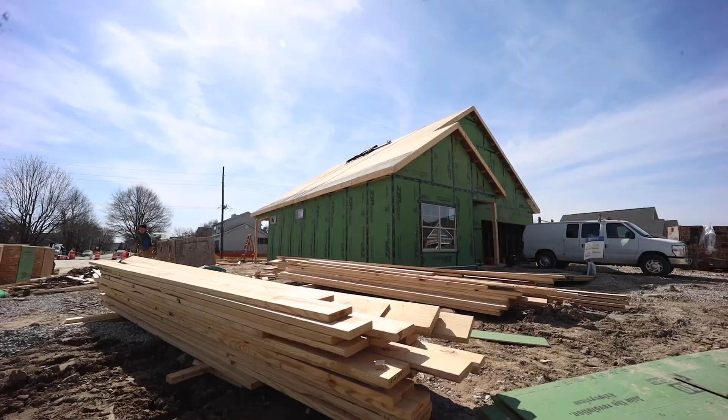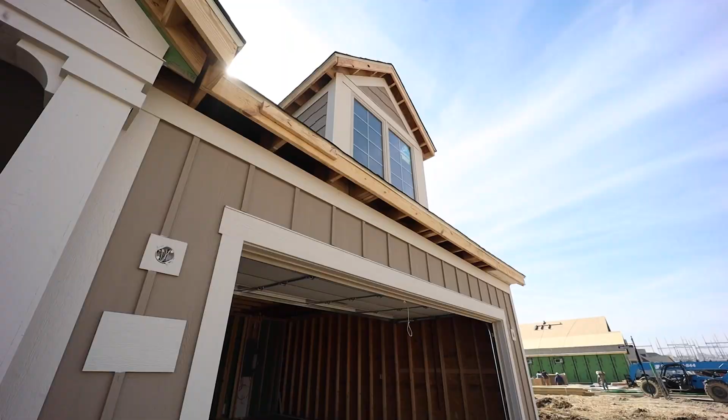Anyway, all right, so let's talk about how we build tight, ventilate in every home, in every market, in every band. A long time ago, we didn't have to worry about this. And it wasn't actually that long ago. If you actually go back to the 1970s, we were building houses so leaky that I'd say we had an air management strategy, and it was to allow the house to manage the air.

If you've ever read any history books about the people that lived in the American plains, they'd talk about waking up in the morning and dusting the snow off of their comforters because the snow would blow through the windows, and wiping their windowsills down every day from the dust that would blow in the house. We built some pretty leaky structures, and that way our inside air and our outside air kind of equalized, over time.

The challenge is we got to the 1970s, and we started inventing tools and looking into building science, and we had the energy crisis, more specifically. I lived through that—a couple of people here have enough gray hair that they actually lived through that. And we started tightening up our homes.

I remember originally, man, we'd take plastic sheeting and put it over all of the insulation and then put the drywall up against it. Don't do that now. But we used to do all of that kind of stuff.

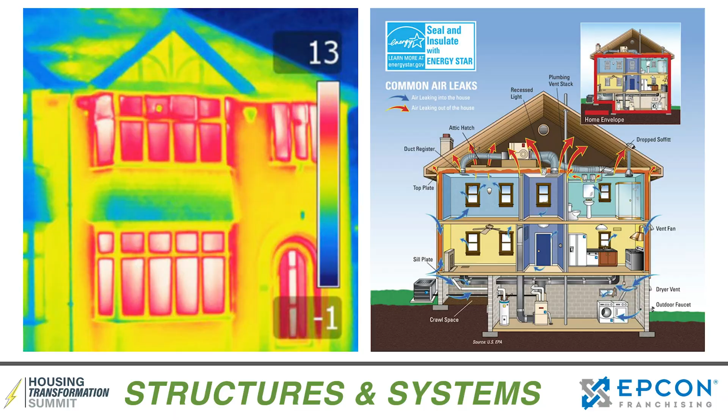We'd tighten these homes up because we were trying to get a really energy efficient envelope. But then we started realizing when you tighten a home up like that, there are unintended consequences with respect to condensation, air movement, the amount and quality of air in the home, the volatile organics in the home, the particulate, et cetera.

So we got to a point where we figured out that with the technology we're building, you can build too tight. You can make a house really tight, but without the air management science side of this, it's not a healthy home. It's not a comfortable home to live in, and it ends up with a lot of consumer complaints.

So from there, we have a new era. Now we're actually looking at what I call a new term: atmospheric management. The reason I call it that is because when you start talking about indoor air quality, people go, oh yeah, that's particulate—we're going to filter that.

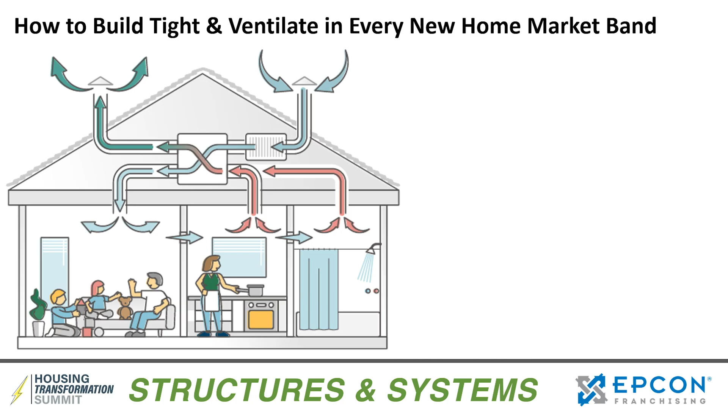Yeah, but it's humidity too. It's also gas concentrations. What about CO2? CO2 is a big deal in a home, and how are we managing that? What about radon? You can walk through all of these different things. What we're really trying to do is create an atmosphere inside a living structure that is healthy and comfortable for people to live in.

That means we're going to manage particulate. That means we're going to manage gases. We're going to manage temperature. We're going to manage all of these things in a fairly complicated system.

So it used to be we had temperature control, and that was what we did. It wasn't really atmospheric control, it was temperature control. Now we have atmospheric control—we're trying to control temperature, humidity, air quality, particulate, gases, energy recovery, room-to-room and inter-room air stability, even air safety with things like CO.

We have other systems that measure smoke, CO, and things like that. But if you're actually measuring and managing the entire atmosphere, my view is those systems are all going to coalesce at some point.

We're going to be sampling the air in our homes, and it's going to deal with all of these issues in a closed-loop system. Every day, every hour, we're going to have homes that are comfortable to live in, that are healthy to live in, and that give us information back telling us we're living in a much better home.

When we get there, the difference between a used home—where you don't know whether that home is hurting the health of your children—and a new home, where you have a monitor on the wall showing that every single day they're living in a healthy environment, that will be a huge differentiator for our industry and our ability to extract value from that.

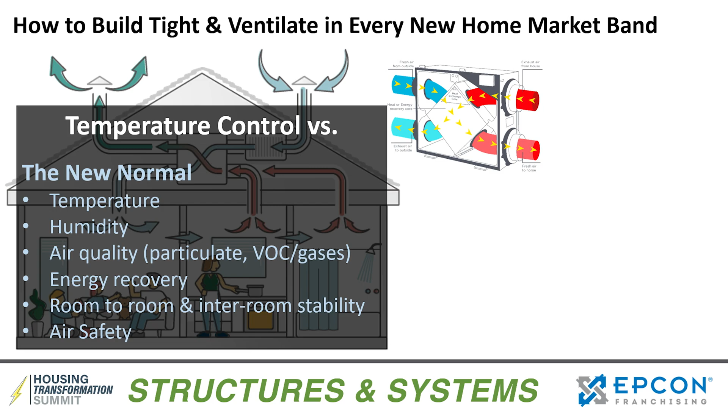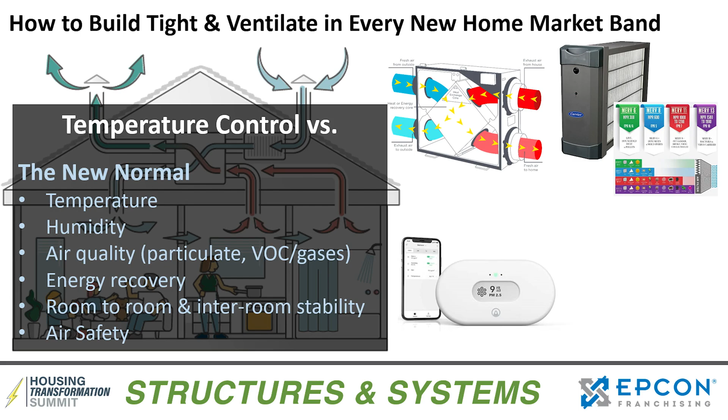We have a lot of new parts and systems you hear about all the time: ERVs, all kinds of electrostatic filters, 4-inch filters, HEPA filtration, MERV ratings. We've got all kinds of control systems out there as well. So this stuff is all starting to come together.

Today I'm super excited because we've got three individuals up here from completely different backgrounds. We've got Cam from Carrier—he knows all about the technology of all the parts and pieces that go into the home. They have incredible research centers; we had several pre-meetings with Carrier to talk about their technology. He's going to come up here and talk about why buildings fail and what you can do about it.

And then you've got a superhero of mine, Brian McCarthy. Brian owns, runs, and founded Abrazo Homes, which is the largest private builder in New Mexico. He absolutely terrifies the rest of the builders there. He is a visionary—no, I'm serious, you're a visionary. He does things that other builders don't do.

It terrifies them and makes them change as well, on your coattails, but they change because they have to. Because who wants to buy a home that's not an Abrazo home? Nobody, that's the bottom line. If you're in Albuquerque, nobody wants to, you're forced because you're out of homes.

Close to it. Yeah, but I'm serious. He has positioned himself building a better and different home.

And you're going to talk about your history. You didn't always build them that way. My guess is your first home was pretty shitty. Okay, I've never had him go, yeah, I built a shitty home. Okay, this is a first. Oh, but we learn, right? We learn and evolve, and he, as a builder, is going to kind of tell you his journey.

And Jefre Outlaw, I've known for a very long time. Jefre was your worst nemesis. He was actually a mold inspector for many years, right? So he was out there seeing the carnage in our industry, how homes fail, figuring out and going through the diagnostics to figure out how they failed, what they needed to do, how do you remediate. And then he switched from there and he went into the tiny home industry.

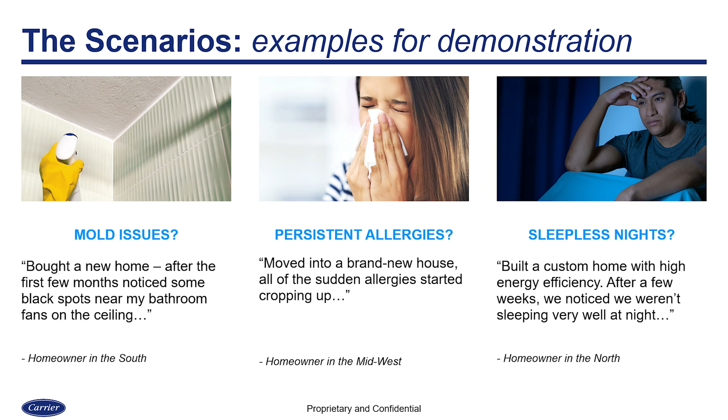Same thing on allergies, right? They move into this house and all of a sudden they start breathing the air. They start to get used to it. It's too tight, the air can't get out. You don't have any exfiltration in the home because we've built it super tight. Their allergies start to crop up. Their noses are running, they're sneezing. They're doing all this stuff because they have a dog. They're allergic to dogs, but in their last house it was breezy as all get out.

And so you had this nice air balance here. It just concentrates, and that dander is everywhere. And they start to sneeze all the time.

Or if they're in the north, and this one actually happened to me, it's sealed up too tight, that CO2 gas starts to concentrate. One of the leading indicators of really high CO2 is you sleep like crap because you're not getting enough oxygen to put yourself into REM sleep to allow your body to actually relax. And so if you have that concentration of CO2, you start to have problems with sleeping.

That happened to me. I lived in a house in Minnesota with zero ventilation. In the winter, when I had all my windows shut because it was negative 20 degrees outside, I had accumulations of CO2 and my family couldn't sleep. So we had to figure out how to manage that in our home. And once we did manage it, we were able to sleep again, which was really nice. You don't realize how much not being able to sleep well impacts your life until you don't sleep well.

So I have a very specific use case for this. This is a video from 3 weeks ago in my town in Houston. Ironically, as I was putting this together, this popped up on the news one night. I was like, what are the odds that this is going to pop up and be relevant? But I wanted to play this for you. This is not like theoretical stuff that's happening in the world. These are things that are happening right now.

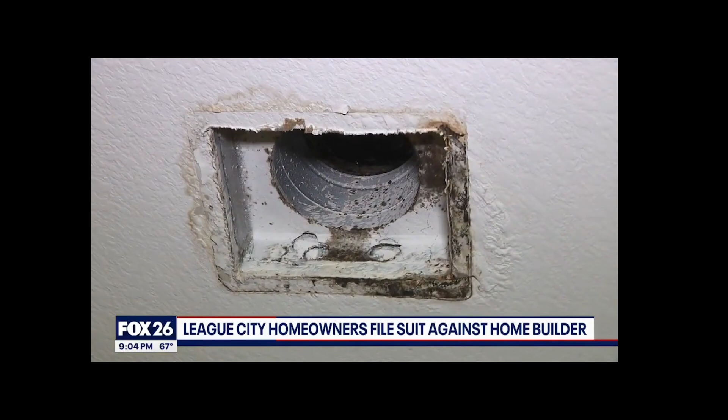This is Ashley Olive's dream house, but she and her family haven't lived here for almost 2 years. I tore out this supply vent, and this is what we found. According to the lawsuit, the reason Ashley and 2 other homeowners in the same block have fled their homes: dangerously high levels of 3 kinds of mold.

It's not healthy for them, for anyone, to live in an environment with extraordinarily high mold counts. Ashley's attorney, Ernest Freeman, says a professional mold inspection confirmed the dangerously high levels, in the tens of thousands of mold spores per cubic meter, in some instances over 1 million.

Specifically it deals with improperly ventilated attics, and then the attic space not being properly sealed to the living spaces below. So you have a hot buildup of humid air. It was consistently reoccurring enough.

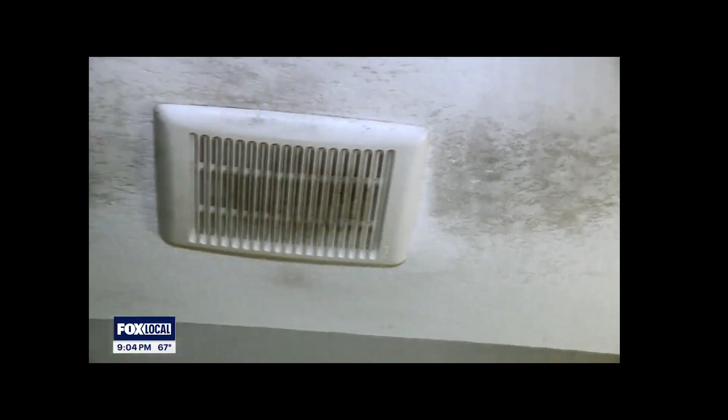Ashley says she and her family moved out of the house in the summer of 2022 after a licensed mold consultant issued a letter stating, in her professional opinion, the home was unfit for human habitation.

It really just depends on the day. Some days I'm mad, some days I'm sad. More than anything, I just want to bring my children home.

Ashley and her husband are paying the mortgage, rent on another house, and all the bills for both houses. There was certainly some mom guilt knowing that I had all 5 of our children living in this home, knowing that it could be potentially affecting them in their future and what that would look like. We definitely struggled with knowing that's what we had raised our children in.

Yeah, so that was on my news in Houston. And they identified the builder a couple of times.

So this is the extreme ramification of not managing the air quality in a house, right? And what I see more and more, especially from the performance side, is as we tighten, we're not paying attention to these other aspects. And when we tighten, they explode in terms of their importance.

And this is the result, right? This is a very visual result. Mold is black, and when it's on the ceiling, you see it and you know it. But longer term, just as you guys were talking about PEX yesterday with chlorine...

If we don't have the code, we don't have the analysis, what we have is the science. And we know that eventually we're gonna see problems in these houses if they're too tight. And it's gonna lead us to more and more problems like this in the longer term if we don't tackle it up front. So what's causing these problems, right?

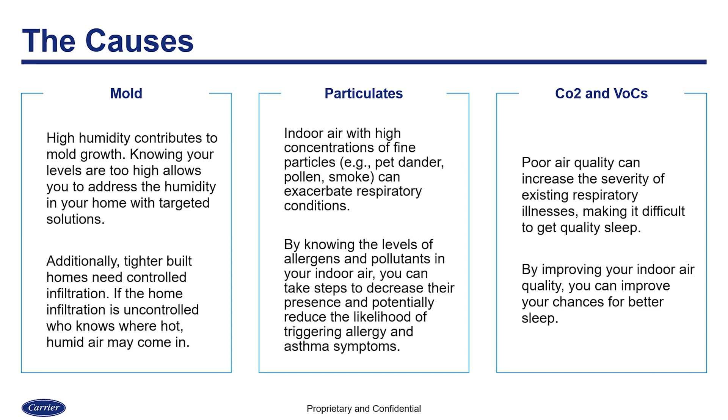You allow the air conditioning system to try and manage it, but as we build really, really tight, humidity spirals out of control, and an air conditioning system that's not dedicated to managing humidity is not going to be able to handle that load. The other reason that we get really high humidity is because our ventilation is not controlled.

So as soon as a person walks into a house, this is my favorite quote, as soon as you walk into your house, your air quality inside is worse than it is outside because you're there. You produce humidity, you produce CO2, you dust off from the day. Whatever you bring into the house, you have made the air quality worse, right?

You got dogs, you had cats, you had people, you had kids, and all the messes they make. Your air quality inside is worse than it is outside, assuming both things are isolated from each other. And you produce humidity, right? We sweat, we perspire, that is a creator of humidity into a space.

So if you don't ventilate to balance that out and take that air out and bring fresh air in, you're not gonna allow that house to breathe, especially with as tight as we're building them.

Particulates from allergies and sneezing and dust accumulation, that one's obvious. We probably all understand that. That's better levels of filtration.

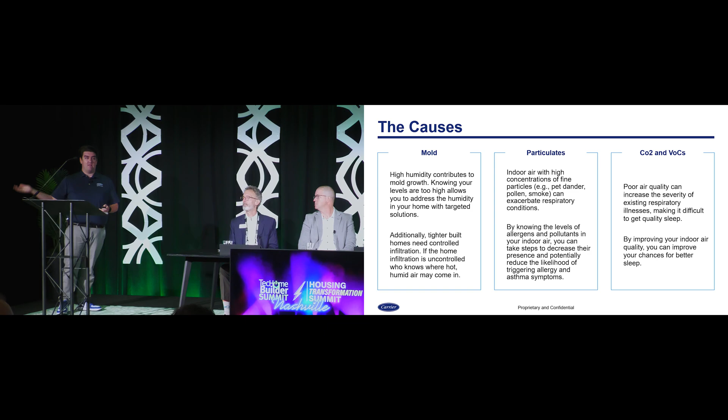But it's also, to a certain point, again, going back to ventilation and allowing that house to breathe and taking some of that air just completely out. Just remove some of that air from the space and bring in fresh air that doesn't have all those particulates that we bring into that space. And again, allow that home to better balance with the outside and create that equilibrium.

And then the last piece is CO2 and VOCs. And VOCs is really tough for us, right? Because we're talking about new houses.

New houses naturally off-gas because they have brand new material in them. One of the biggest challenges I see, and we'll talk about this tomorrow in the last session, is managing that expectation with homeowners when they move into a new house and your building materials are off-gassing, or they bring in new furniture. That's the best time for VOCs to spike, because a brand new couch is loaded with VOCs because they just made it. It's got to have a chance to stabilize in that environment. That's the management aspect, and then we have to drive the education piece with homeowners to understand what it is we're talking about.

So there's really four big spots from a solutions perspective we can tackle into this, where we have equipment now that we can use to help balance these things out. We've seen the effect, we know the cause, so what's the solution? How do we start to look at solutions and products that can help us drive better indoor air quality in a space? It comes kind of top down.

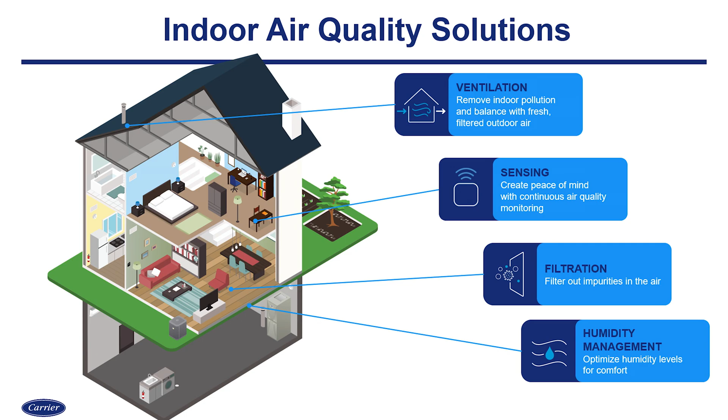Ventilation is my personal most important piece, because if you put ventilation into a home, you at least tackle into a lot of these things. Ventilation is really the only way you can solve CO2, and it's really the only way you can solve VOCs. It will help you with humidity and it will help you with particulates, but it's not the ultimate solution for humidity and particulates.

That's one big piece of indoor air quality - very often it's not one size fits all, and it's not one piece of equipment to just solve the problem. We talk about energy efficiency and say we're going to throw in a high efficiency heat pump and solve the energy efficiency problem. You can't do that with indoor air quality. You have to look at your build, work with your modelers to figure out what the right combination of things is based on the building science of your home.

Outside of ventilation, I'm going to skip the middle one because they stuck it in a weird spot. We've got filtration. Filtration, again, is obvious - you move up to higher MERV filters, you filter more air. It's pretty straightforward. I've been really surprised that out of COVID, we don't see massive adoption of air filtration.

There was a lot of time spent on hand sanitizer and masks and stuff. The studies that came out about nine months after COVID were that if you filter your air and get your air changes up, your ability to spread COVID drops through the floor. That's why airplanes went back so fast, because the filtration systems on those planes are astounding. Planes are super safe places for COVID. Airports suck - that's where you're gonna get COVID. If you went on a trip and got COVID afterwards, don't blame the airplane, blame the airport.

That airplane, you were fine. Even the person sitting next to you - the filtration and the air movement and the changes is so good that they get all that COVID out, and they were filtering that air.

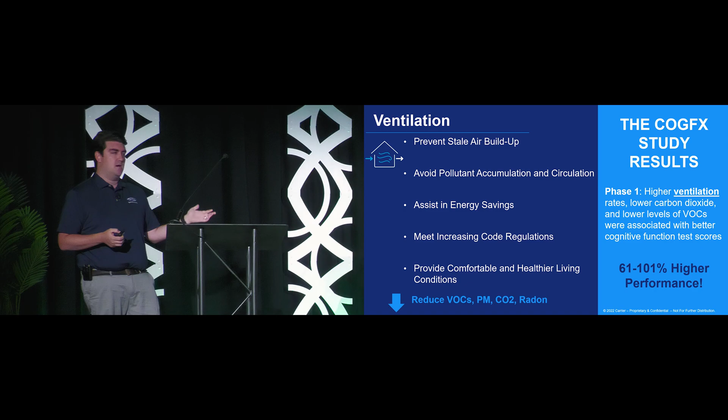From a code perspective, I alluded to code earlier—we're starting to see code adopt this. Up north, there's a bit more of it since they have to build tighter to deal with electrification. In the south, it's still the Wild West, especially where I live. But as those codes begin to march along, California is going to do what California does, as it always does—they'll be the first. It's going to help you hit those code requirements.

Filtration is kind of the obvious one. My favorite stat is that a typical home generates about 40 pounds of dust a year. That's coming out in your air filters, on the ground, on your cabinets, and all that stuff. In some way settled dust is good because you can grab it and get rid of it, but ideally removing a lot of that dust is the best way to handle it.

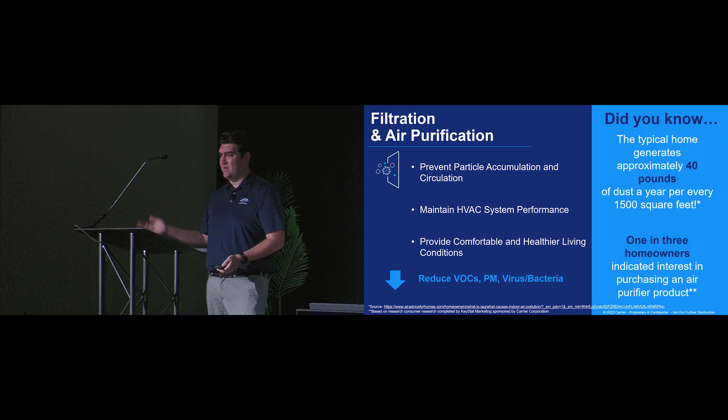So putting in really good filtration is key. Fortunately, COVID did have some impact on people's understanding of filtration and how important it is, so we see a really high demand for filtration in homes. Dyson helped us along too with air purifiers and made them really sexy because they're Dyson. So we have really good adoption from homeowners in terms of understanding air purification.

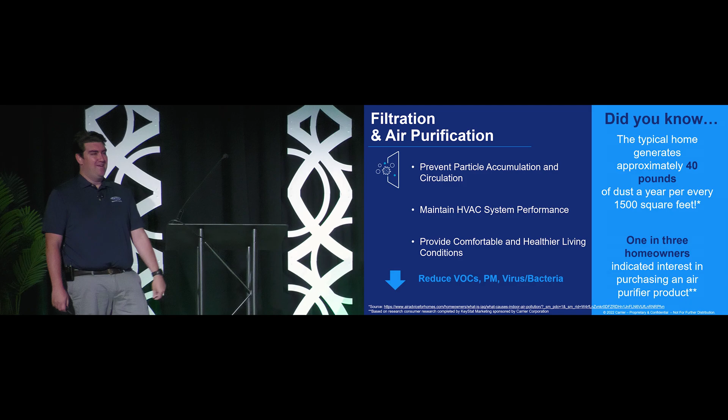The other piece, self-serving for Carrier—if you don't run dust through our coils and furnaces, we greatly appreciate it. It makes our systems work significantly better if they're not gunked up with dust and other things coming through the airflow.

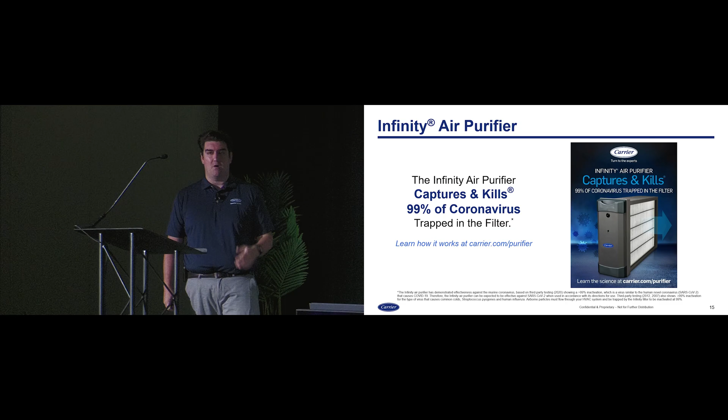Then the last piece is humidity management. The obvious one, probably the most straightforward outside of removing dust: if your humidity is too high, dehumidify; if too low, humidify. My home's in Minnesota, I had both—ironically I humidified in the winter and dehumidified in the summer because it's one of those weird climates.

One piece that doesn't get talked about a lot with humidity management is the ability for homeowners to save energy on their HVAC system. We don't spend nearly enough time talking about wet bulb versus dry bulb, and I'm not going to do that today. But if you are controlling the humidity in a house, your ability to use a more energy efficient set temperature is extraordinarily higher.

For example, in a home where you are not controlling humidity in the summer in Houston, you might need a set temperature of 72 degrees to feel comfortable because the humidity is so high. If you put in a humidifier or dehumidifier and bring that humidity into control, you can raise that set temperature to 76 or 78 and still feel the same level of comfort. That drives a lot of energy savings because every time you raise the set temperature, you decrease your energy bill since your runtime goes down. Driving humidity solutions in is a great way to help tackle energy management in these houses.

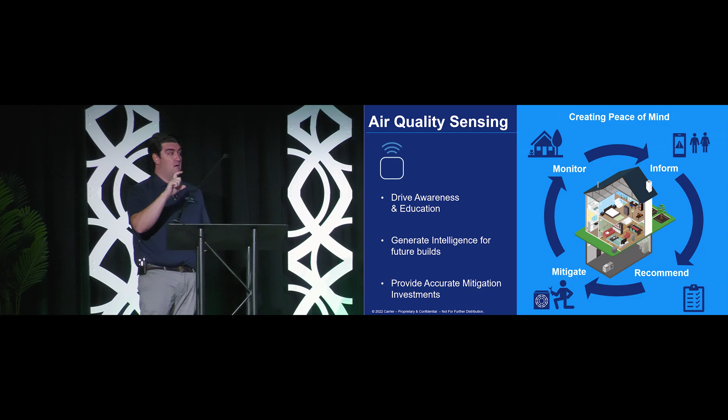So our home controls CO2, our home controls humidity, our home controls VOCs in a way that other homes don't control them. And you can bring it to a conversation that we're able to have, as opposed to one that says, well, if you don't do this, then those other homes are going to get mold, because you can't say that either.

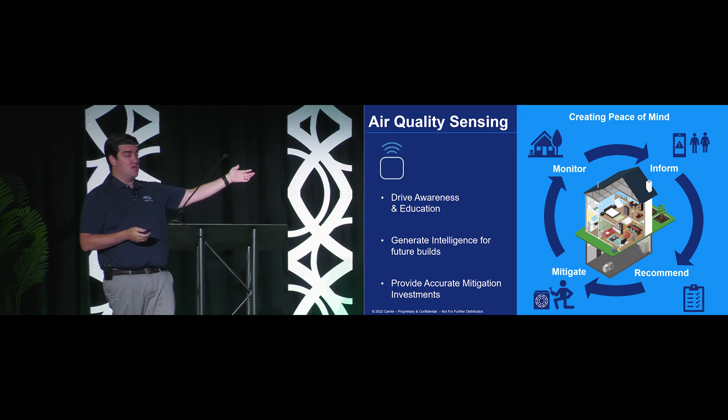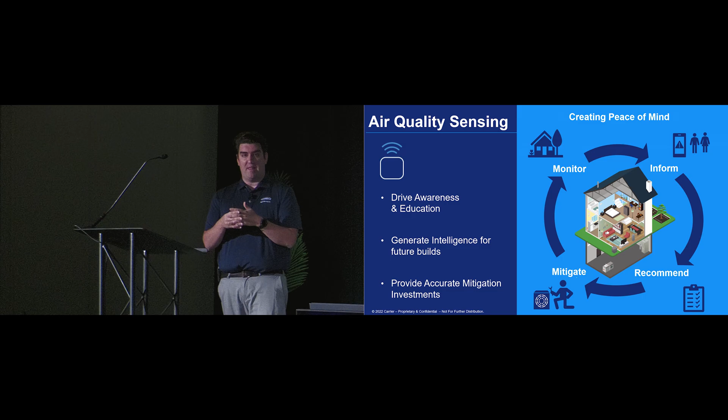It's not that you couldn't, I guess, but I wouldn't, because you're just going to drive weird conversations with your buyers. So you bring it to that, and then they can go to those other homes and say, hey, do you control humidity? I'm like, well, we don't have humidifiers, dehumidifiers.

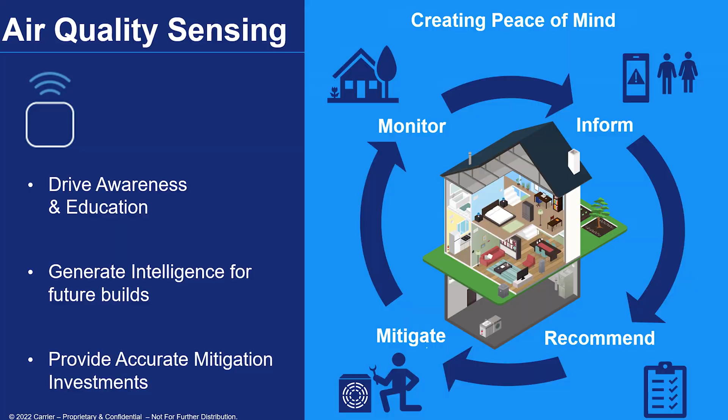And if we don't do it for them, they're going to start bringing these things into their homes, and they're going to start making phone calls after the fact, right? So that's where we have to make a decision: do we want to deal with it after the fact and end up on the news? Or do we want to deal with it up front, address it head on, and figure out a way to have a conversation with someone, and ultimately end up putting in the systems we need to be able to say that we're controlling these things?

So that when these sensors start to come into the house—I can tell you, when I wasn't sleeping well, the first thing I did was I went out and bought an air quality sensor. Because I was like, what's not making me sleep well? I'm warm, I have 4 dogs in my bed, right? Like, why am I not sleeping well? I should be sleeping well.

I brought it in, I set it on my nightstand. The next morning, I got the alert. I looked at the trend, and the CO2 was sky high. Done. If that's a new house and I bought it three months ago, my first call is to my builder, because I'm under warranty. Like, why is the CO2 in my room so high? And why isn't it managed? And what's happening, right? Whether or not you did the right thing or not, you still have to answer that call, and you have to have that conversation, right?

Whereas if we have a ventilator in there and we're managing that CO2, you can go in and say, well, actually, why don't you just tweak your ERV a little bit, run it a little bit harder, run it a little bit higher at night, and we'll pull that CO2 out. So it's creating the ability to have the option to engage in that conversation as these things start to enter the market. And I think we're going to talk about indoor air quality sensing in a second here and how we manage that. So again, it's about building that concept of control, so that when these numbers start to enter homeowners' heads, they have a frame of reference of where they're supposed to be, and that's going to lead them to caring about it.

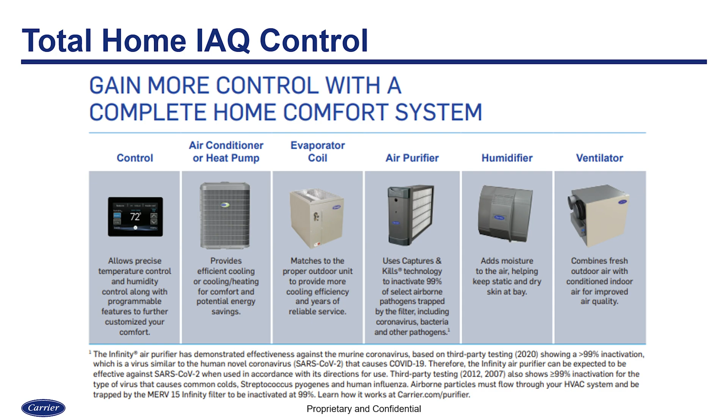And so I think where we as an industry will end up is in controls and systems that can wrap that entire house together and say, all right, we've got a couple of CO2 sensors, a couple of particulate sensors, we're monitoring temperature in multiple spaces and humidity in multiple spaces, and this is how we need to flex this house. We need to run the ventilator higher. Oh, we just had 11 people walk in, right? If you're watching an IAQ monitor, I can tell you when 11 people walk into your house because your CO2 is gonna go through the roof because they're breathing, right?

So at what point do we get to a spot where you see it in the CO2 monitor and all of a sudden your ventilator cranks up, your AC starts to run because it sees more people in the space, you adjust your set temperatures and you run. We're not there yet. I think we're getting there, and there's a lot of technology pushing us there. It's just a matter of time before we can have a really intelligent system that somebody like Carrier lets me sell, which I'm really excited about.

So, very good. So that's me.

Awesome, well I think you painted a really clear picture. I say I can build one house where I sleep like shit, I'm stupid, my lungs are the only air filter in the house, and I compromise my health. Or you build homes that make people smarter than their neighbor, right? And they sleep great, and their health isn't compromised. And you say, well, we can't really talk about that. I think we've got to talk about that. I think we've got to build a better product. If you want to get paid for building a better home, you can't not talk about why it's better. And we're going to have to get to that.

So you're going to learn something now from my little superhero here. Yeah, and I promise we're not going to give him shit about the Lobos, okay? We're not going to do that today, okay? The Lobos, come on. Hey, it's all we got, it's all we got in New Mexico. It is all you have. Yeah.

Tim, thank you, by the way, for the glowing introduction. I really appreciate that, and also for the bold call out for having built shitty houses in the past. And I will confess, I have built many shitty houses. My name is Brian McCarthy. I've been in new home construction since 2001. Our company is called Abrazo Homes. That company started in 2010, by the way.

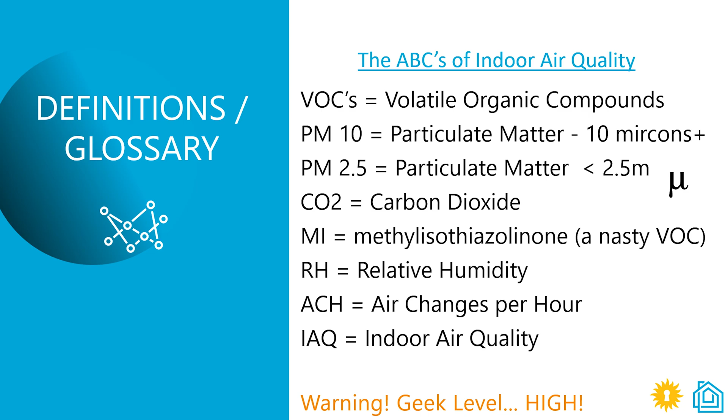RH is relative humidity. ACH is air changes per hour. And of course, IAQ is indoor air quality.

Can I just get a show of hands? How many of you are measuring your ACH in your homes today? And how many of you are not? How many of you don't know? And that's okay.

One thing to talk through here is that we're facing pressures today to tighten up our air envelopes and build almost airtight homes. IECC 2024 - net zero is an approved standard of that code. Your code adoption cycles will vary depending on where you're building. If you're in California, net zero is around the corner. If you're in Texas, you might have 6, 7, 8 years before the code is adopted.

But when we get to a net zero home, the best way to achieve it is to have a very tight envelope. You're probably going to have under 1 ACH, air changes per hour, in the home, trying to create a very tight energy envelope. At 1 or below, that's a critical threshold we have to talk about, basically sub-1 for ACH.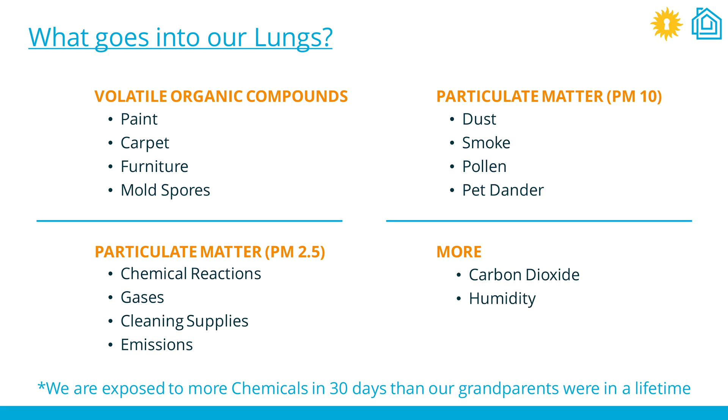So what's going into our lungs? VOCs, volatile organic compounds, are coming off of paint, carpet, furniture, mold spores, particulate matter. PM10 is a larger particulate matter, a larger molecule - dust, smoke, pollen, and pet dander are some of the big ones we're seeing for PM10. And particulate matter 2.5 - almost all of these are microscopic. I'll show you the scale in just a moment.

But these are chemical reactions - gases, cleaning supplies, and emissions. These are all going to be absolutely invisible, and more. So we talked about carbon dioxide and humidity.

This is a really interesting fact that struck me when I read it: we are exposed to more chemicals today in 30 days of our lives than our grandparents were exposed to in a lifetime.

And if you think about that, ironically, we've talked about the pandemic and everything else, and everybody's going through trying to be super diligent. What are we using nonstop to try to manage viruses? Chemical sprays, Lysol, antiseptic, hand sanitizer - we're just spreading all this chemical madness all over the place to try to control the virus. But ironically, some of those things could have been doing as much harm as good on the air quality side as well.

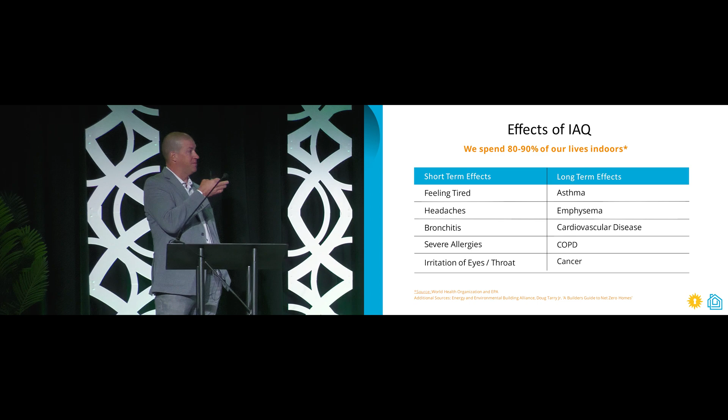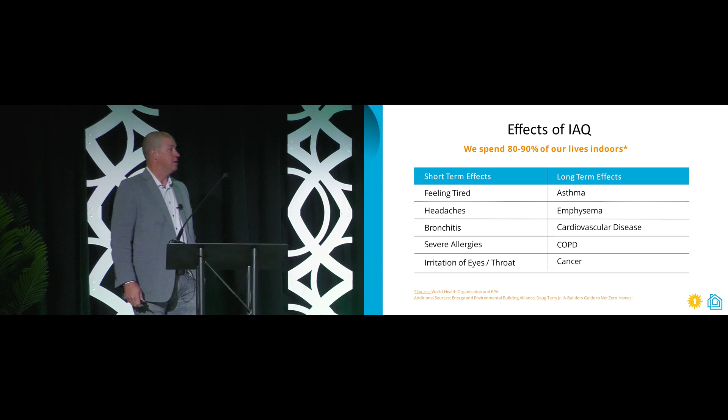The short-term effects you'll start feeling from indoor air quality are feeling tired, headaches, bronchitis, severe allergies, irritation of the eyes and throat. And long-term effects of living in poor conditions include asthma, emphysema, cardiovascular disease, COPD, and even cancer.

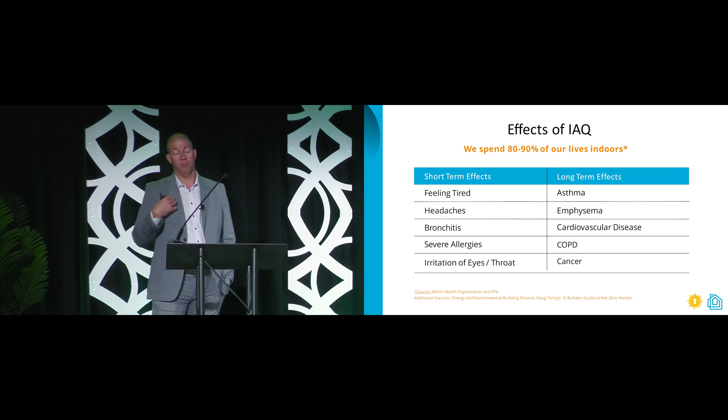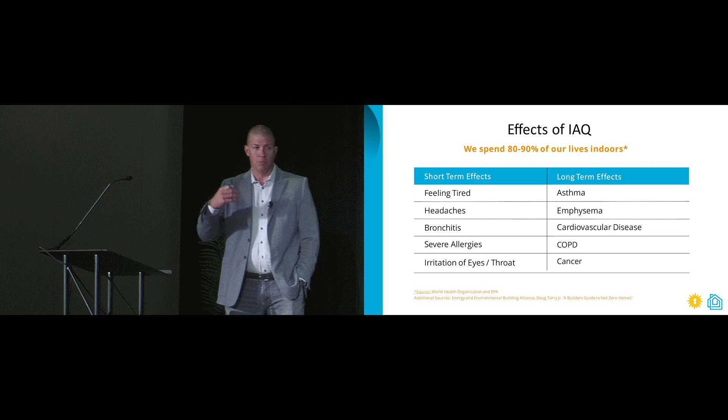I really believe we had Erin Brockovich to kind of kick off the whole thing about water, and people have become way more sensitive about water over the last 15, 20 years, rightfully so. I think the next domino to fall is air quality. There's going to be more and more studies about the quality of the air we're breathing, and it's going to become a hot topic.

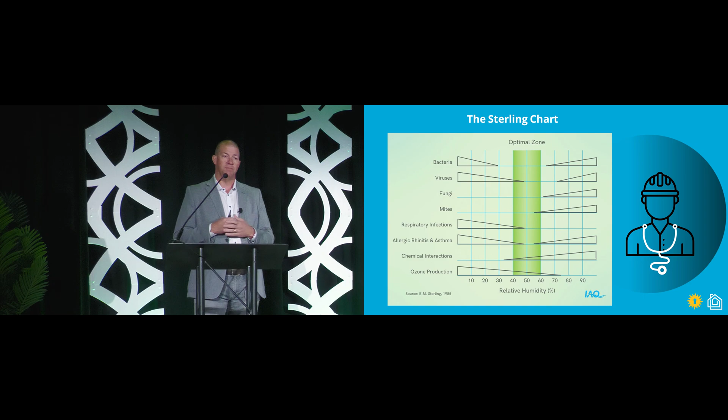This is the Sterling chart. It's an old study, I want to say from 1985 or so, and it talks about managing relative humidity. These are the bands of humidity from 0 to 100, and the risks and concentrations of different items at each band - dry mold and wet mold, bacteria growth, viruses, fungi, respiratory infections, etc. In a nutshell, 40 to 60% is your ideal range for humidity. If you can be around 50% plus or minus, that is the happy spot for humidity to be located.

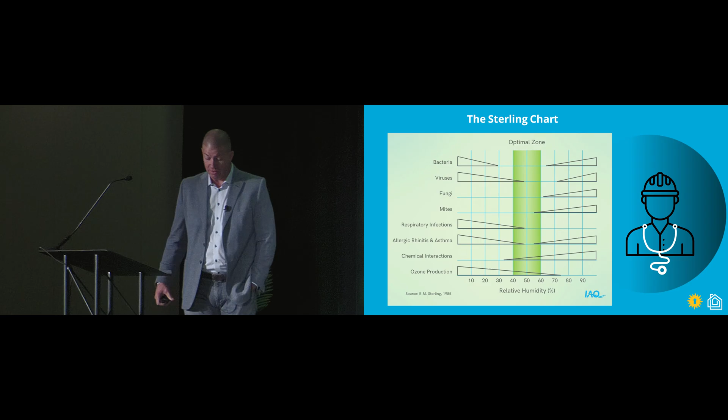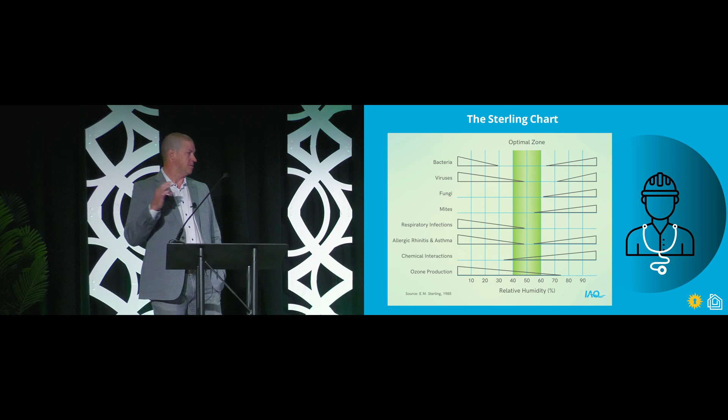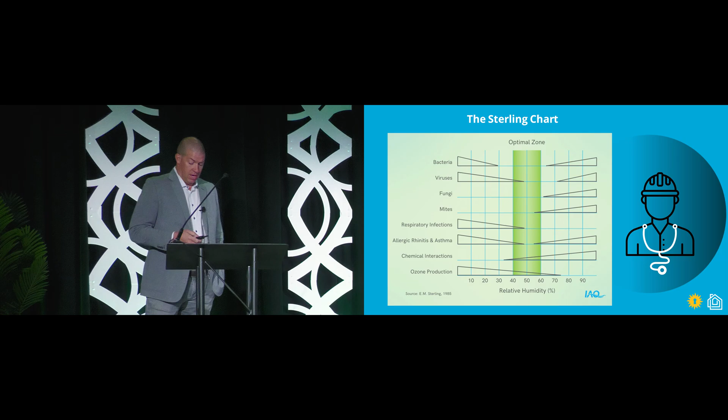I think people talk about home builders and we get a bad rap sometimes - they say it's blue collar, you're just a builder or contractor. But the amount of information we have to know and digest in terms of systems, air control, home health, not to mention OSHA, FHA, VA and all the regulations - we're actually going to have to embrace being a bit of a medical advisor for our homeowners going forward, which is a little scary, a little crazy.

New Mexico, by the way, is the 5th largest state by land area. Our southern border is Mexico - we're basically the northern portion of the Chihuahuan Desert, all the way up to Taos and Red River. We built a unit up there at 9,000 feet elevation. I think we have 4 climate zones in one state. Your states are probably similar in terms of where you build, but you really have to design these systems based on locality, climate, and all the other conditions.

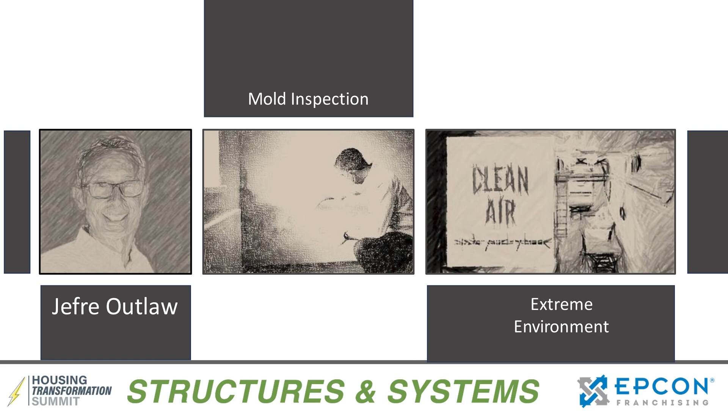Yeah, so over a couple of years, I went through about 300 houses. We would get the call for multiple reasons, right? There'd be visible mold, someone would be sick in the house. I wasn't the testing company. I was the one that came in either before or after testing, put together a remediation plan, and figured out how to fix the problem.

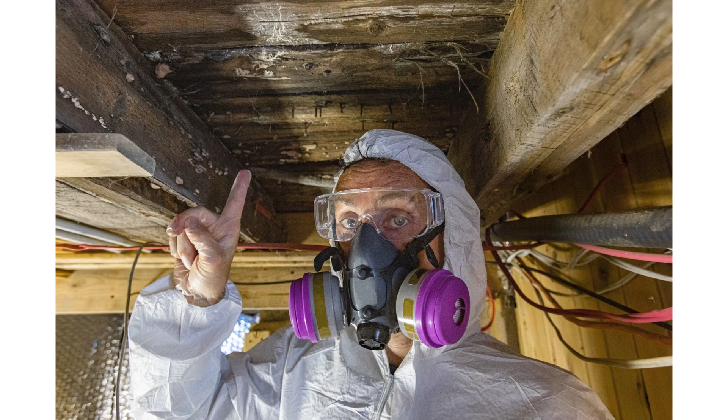And so we did this, we used moisture meters, of course. We would see a lot of visible mold. Sometimes you wouldn't see a lot of visible mold. We'll get to this one here in a second, but the interesting thing is that about 70% of what we saw was water leak damage, right? Everything from failed plumbing. On new construction, it was typically nails or screws through water pipes.

About 20% of it was roofing related, right? The flashing was done wrong, or the roof was damaged, not repaired over time, deferred maintenance. And about 10% of it was really poor ventilation, most of the time in bathrooms, right? The ventilation wasn't even there, or the vent pipes weren't even hooked up.